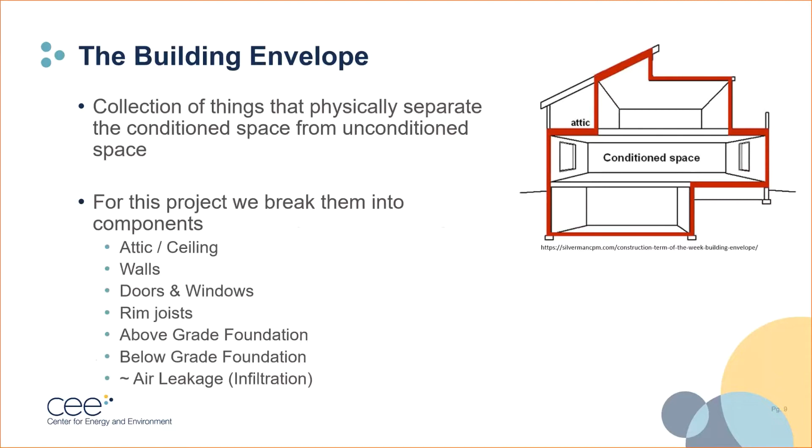And maybe not surprisingly, the building envelope drives space heating load. For those of you who don't know, it gets very cold in Minnesota. Our envelopes shield us from the cold. Their efficiency essentially determines how much energy our heating systems use to keep our buildings and our homes warm, or at the very least not too uncomfortable.

And since it's so cold up here, we do spend the majority of our energy budget heating our homes, sometimes up to 80% for a single family home. And to do that, most of us burn natural gas to meet this load. About 2/3 of single family homes in the state use natural gas to meet the space heating load. Thus, it stands to reason improving envelope efficiency is the largest natural gas savings opportunity in the state.

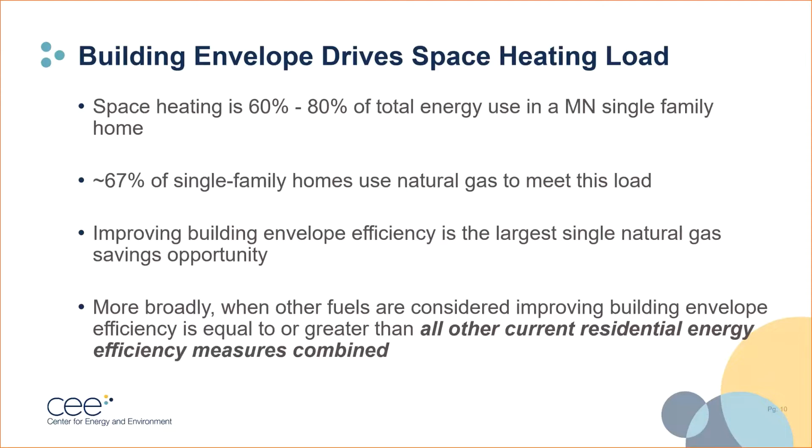More broadly, if we consider the remaining third of our homes that are heated by electricity or propane, and the fact we have to cool our homes, improving building envelope efficiency is overall probably the biggest efficiency potential. In fact, it's probably very likely greater than all other residential efficiency potentials combined. So this is a really big deal. It also turns out to be a very hard and long-standing problem. So how have we gone about treating this problem in the past?

Well, retrofitting building measures is an established process. Conventional measures that do this are often called weatherization. Mainly, we go into houses and seal air leaks. We add insulation to walls and attics. Sometimes we upgrade windows. We often add storm windows to older single pane windows, and we consider window treatments. These things are awesome. And there's been a lot of work done into streamlining these measures and making them cost effective, both in Minnesota as well as nationally.

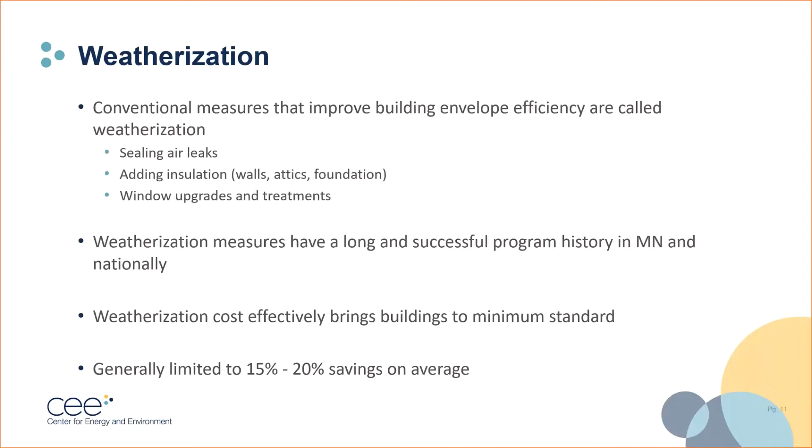However, weatherization is focused on basically bringing the worst buildings up to a minimum standard in a cost-effective manner. That's not really high performance. In fact, while results vary a lot, savings are typically around 15 to 20% for these projects. They're large and good for sure, but they're only a fraction of what's possible in regards to envelope efficiency in a heating-dominated cold climate. So how do we move beyond weatherization? Well, the simple answer is we already know how. We just basically do more of it.

Probably the most long-standing concept beyond weatherization is called the deep energy retrofit. These are sort of whole house projects that seek to overhaul all the systems in a house for very large savings goals on the order of 50% or larger. These projects aren't exclusive to envelope work, but especially in cold climates, the absolute savings of a DER are always anchored by envelope improvements. They bring the most to the table. But in practice, these projects are complex, often invasive and very expensive, and they're usually pursued by extremely motivated building owners who are driven by environmental and comfort-based decision metrics. So what's another perspective on high performance envelope?

Well, this might be somewhat controversial, especially if you're involved in building new high performance homes, but I think current Minnesota new construction code is pretty good for single family homes, of course, relatively speaking. This table shows the difference between existing buildings, so say all those buildings before 1990, and current minimum code, as well as what I hope would be the future code. What I want to highlight here is the difference between the numbers in the first row and the second row. The first row is sort of an average. We just think of it as an efficiency value of the envelope components for the homes built before 1990. The second is current code.

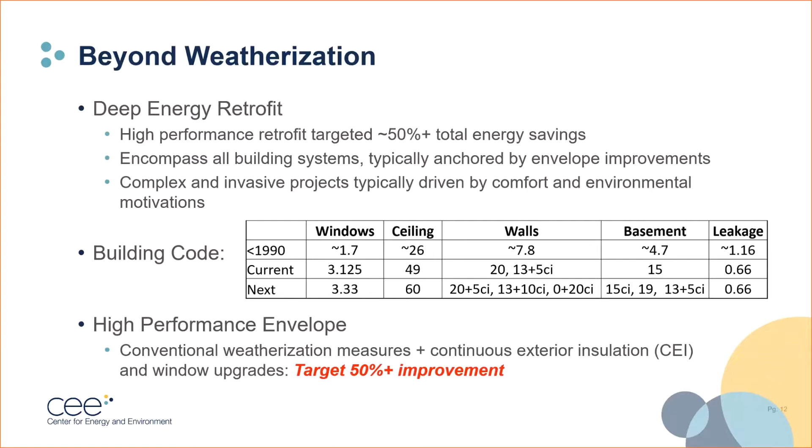In this project, we set a target of 50% to try to match new construction or get reasonably close. We call that a high performance building retrofit. Specifically, we want to see how we can apply weatherization measures, continuous exterior insulation, and window upgrades to achieve that target.

So why, how do we move beyond weatherization? Well, there's lots of reasons for why, in addition to the raw efficiency potential. First of all, we should recognize that we are facing diminishing returns on lots of energy efficiency alternatives. We've already captured a lot of that efficiency.

Maybe this would be required to meet future CIP savings targets. Maybe it'll be required if we're realistic about achieving our climate targets. Energy burdens, infrastructure investments, workforce developments, these are all strong motivators for pursuing this work.

So that aside, what are our objectives? Basically, our objective in this study is to look around and see where we're at today. What are the opportunities and barriers of moving beyond weatherization, according to the stakeholders who are most likely to implement that work? What does it take to make a high performance envelope? What are the natural gas savings, the project costs, and the cost effectiveness? And how do those things vary across our existing building stock?

So next I'm going to hand it over to Lindsay, who's going to describe briefly our outreach methods for this project. Yeah, so one of the initial portions of this project was to interview a variety of stakeholders who would work in this market. So our methodology and goals were comprised of these two aspects. First, we wanted to identify the opportunities and barriers as perceived by the stakeholders. And based on their perspectives, we wanted to try to quantify potential savings, cost, and market opportunities for these projects.

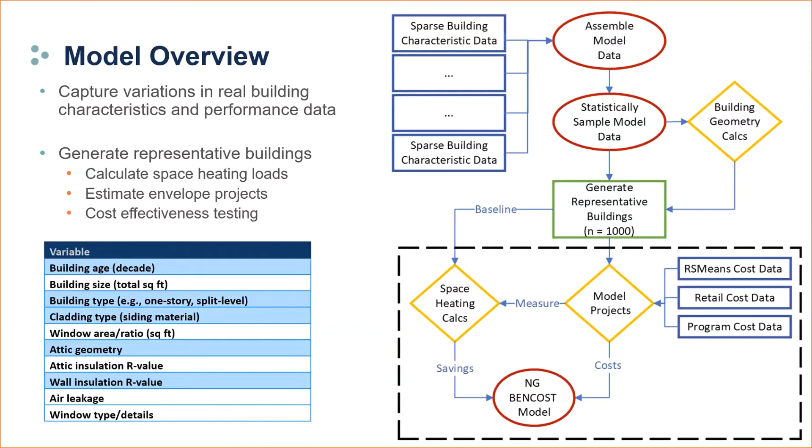And separately, we pulled in cost data from several sources to try to build up envelope projects. Those sources include RSMeans cost data, retail cost data, supplemented by program cost data and bids that we received recently. The idea then is we create these projects, that they create a measure. We can estimate energy savings from those measures. We also have the costs, and we can pipe both those through a cost benefit test. And ideally, this gives us a fairly representative perspective about how savings, costs, and cost effectiveness vary across the building stock. And then, of course, we can vary this for all sorts of envelope projects.

So I'm going to get right into the results here by handing it over to Lindsay. We'll talk about our outreach.

Thanks, Josh. Yeah, so after talking to multiple stakeholders, we came across this first big barrier, which was the lack of awareness that people had for this kind of work. So stakeholders who were interviewed were asked if they were familiar with various types of retrofit. We asked them on a broad scale of retrofit projects like the ones listed here to try to understand what sort of information they were basing their responses on throughout the interview.

We found that many stakeholders were familiar with passive house or being net zero, but not as familiar with high performance envelope retrofits. This was also reiterated through other learning workshops that we attended, but from our findings, we found that 68% of people claimed familiarity with retrofits, while only 52 to 58% could actually define or give examples of a deep energy retrofit specifically.

About 30% of people were just unaware of the work at all. 18% admitted that they didn't know what we were talking about, and 12% just didn't answer the question. So we did give people a definition during the interview, and we kind of discussed and gave context to what we were talking about, and that was our final results for that. So basically, people just didn't know what we were talking about.

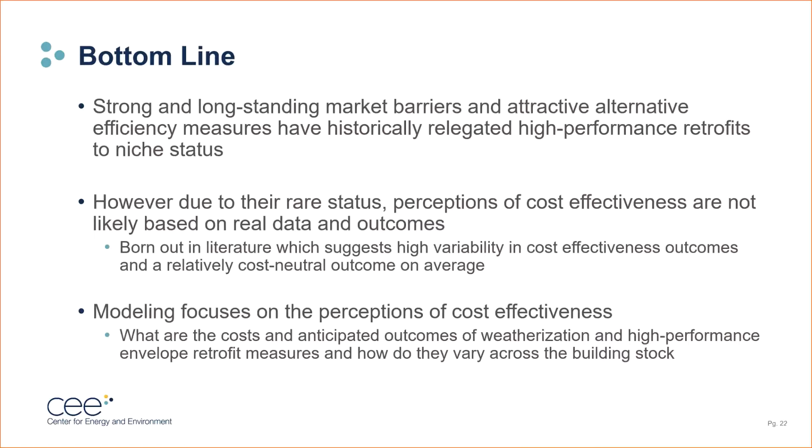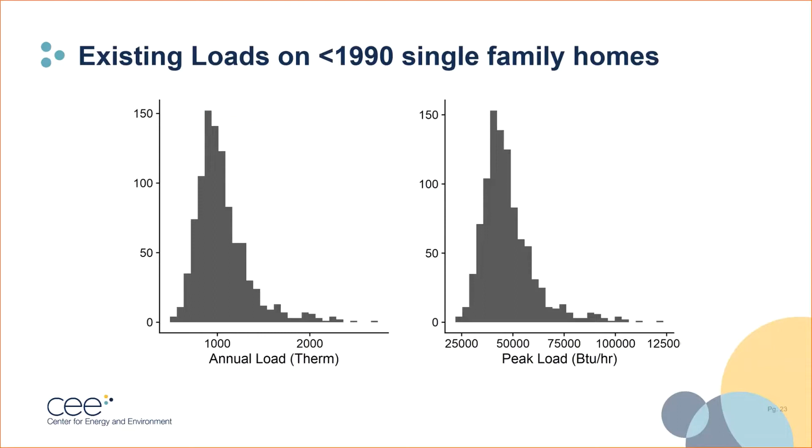Importantly, we've arbitrarily set this benchmark at 1990 for homes that existed before energy code was taken seriously. So for our project, though, we're a little bit more concerned not about the overall loads, but actually what components in the building drive these space heating loads. So the next slide.

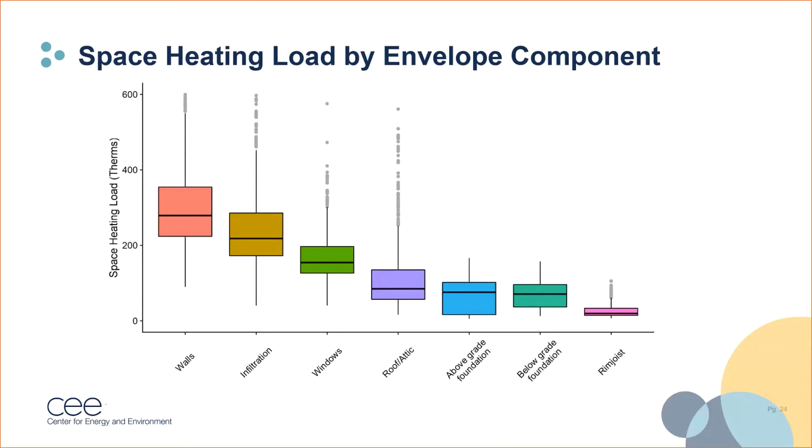So after those major components, we have some of the other things that are not the focus of this project, including the roof and attic in that, as well as the foundation components and the rim joists. So what is our first step? The first step is to use our model to weatherize all these buildings. I want to note that when we say weatherization here, we came up with our own standards, typically lower criteria for engaging weatherization, and then more rigorous standards on what we expect out of weatherization.

We have 5 measures here: air sealing, attic insulation, wall insulation, rim joist insulation, and continuous exhaust ventilation. The last is sort of an artifact of the fact that once you do several of these weatherization steps, the home is often tight enough that it needs some continuous ventilation to enable appropriate indoor air quality. The basic assumption behind this weatherization work here is that we should emphasize weatherization work more than more expensive envelope work. Turns out that this assumption may need revisiting later on, but we'll save that.

So our project costs are based on regression fits to weatherization project data by building size and type. We estimate the costs from that work, and then typical air leakage reductions and the differences in the insulation values of the upgraded assemblies. I want to make note here that we do need weatherization on most existing buildings, even those that are partially weatherized. Basically, we can't get to our target of 40 to 50% space heating load reduction without some kind of base of weatherization to build on. To do so, for example, using continuous exterior insulation requires very thick assemblies and an even larger dependence on windows.

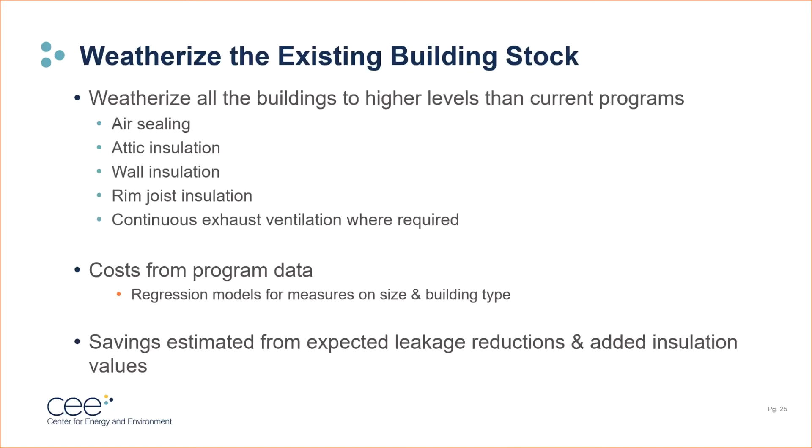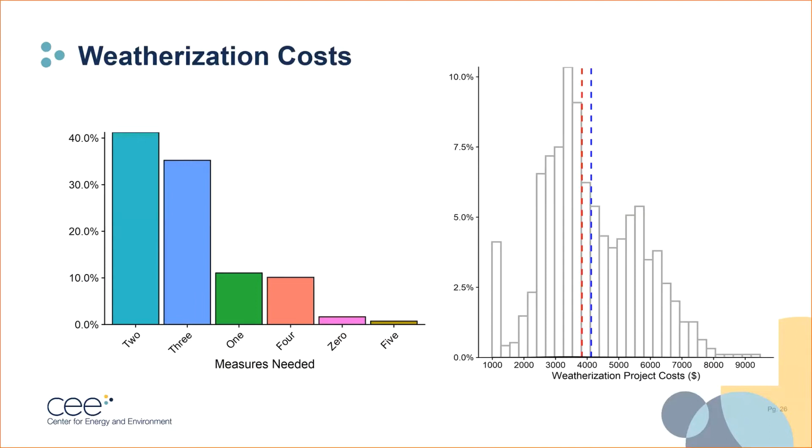On the right side, you can see the cost distribution. We have the average cost in blue and then median cost in red. Again, these both are pretty similar. They come in around $4,000. They're about the cost of doing 2 or 3 weatherization measures. But you can also see on this distribution that it's highly variable, varies between about 1,000. In this case, I think we capped it at 9,500 for this chart.

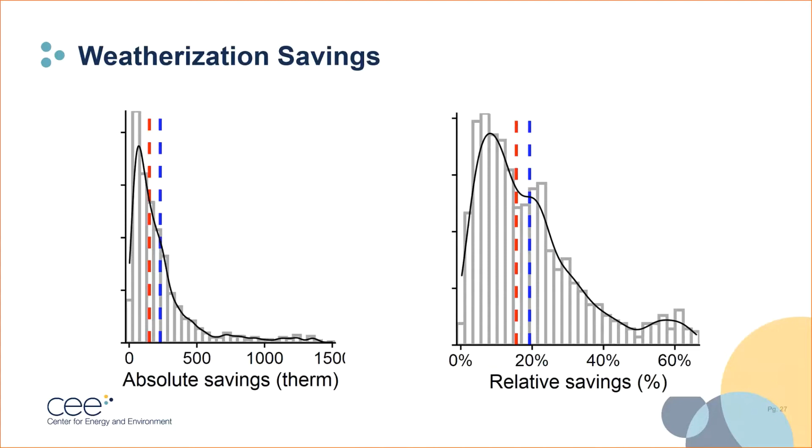So one question we have is, does weatherization actually change our priorities in which building envelope components we should go after compared to the unweatherized building stock? In short, no. Most of the losses are still coming from the walls, infiltration, and the windows in that order. So our next step, as Lindsay discussed earlier, is to try to understand what our opportunities are for taking it up a notch in terms of our envelope efficiency.

In short, we want to add continuous exterior insulation on top of existing recladding projects. There's several reasons for this. First, there's lots of opportunities. We have a lot of buildings that have siding that is beyond end of life. Secondly, many of the costs between a continuous exterior insulation, or CEI for short, and a recladding project are shared. And in fact, this model is pretty conservative. I expect that in practice, there's probably a lot more cost sharing that could be recognized here. And third, exterior renovations have fairly good cost to value ratios. They make dramatic aesthetic improvements to existing buildings.

People like them a lot, and they tend to recoup a fair amount of that in their home equity, which is an opportunity for us to expand energy work if it can be coupled with something that's very flashy, as Lindsay mentioned. It's also an opportunity to couple that with other non-energy benefits, thermal comfort being the main one. And the idea here is coupling these things to make a more attractive package to consumers who may be considering or maybe have been told they need building siding maintenance already. We can upgrade at the time of sale, either pre or post occupancy, or offer a more compelling package compared to other flashy, large dollar energy investments, such as solar photovoltaics or electric vehicles, which frankly are both outperforming envelope retrofits by orders of magnitude, despite probably similar or lesser net benefits.

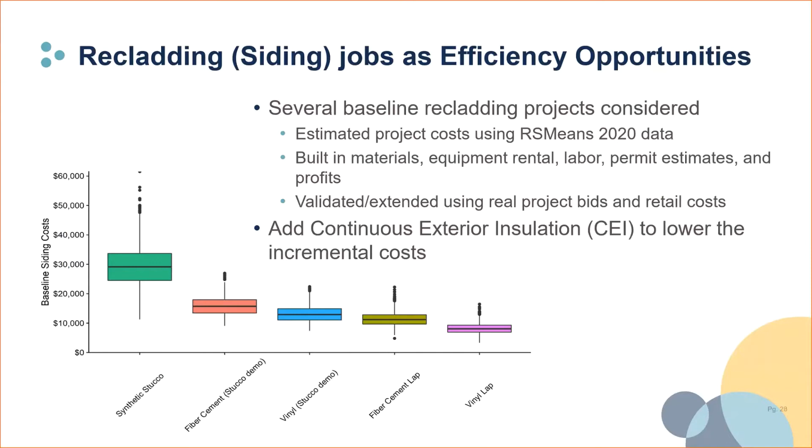So what's next? How do we leverage these projects to improve envelope efficiency? Well, we add continuous exterior insulation. Those siding jobs are our baseline upon which we can bundle CEI and ideally our weatherization and window work. There's a lot of insulation types that people consider for these projects. We've applied many of them here. And again, we try to build up projects around the steps that contractors would have to take to fit these into an existing recladding job.

We have our standard rigid foams, our EPS, our styrofoam, our XPS, extruded polystyrene, our PIR, also known as polyiso. We have our EIFS, which is our synthetic stucco. EIFS is exterior insulation and finish system. I'll note here that this is the only recladding project that actually incorporates some substantial R value in its construction, in this case, 1 inch of EPS. But we could add more insulation to that process too.

SIP is another project that works, structural insulated panel. It's essentially EPS sandwiched by OSB. It has nominally the same insulation value as EPS, but comes in fixed sizes, matching existing dimensional lumber. Then there's our closed cell spray foam, which we kind of apply exterior continuously on the sheathing. Then we have 2 semi-rigid products, mineral wool and something very similar to mineral wool made out of wood fibers.

We look at applying these products and all the construction steps at different thicknesses, which entails doing additional work. Basically adding thickness to the insulation assembly lowers our relative insulation costs, but it adds a lot of ancillary costs. In short, the details can get expensive, and with especially thick envelopes, they can get very expensive.

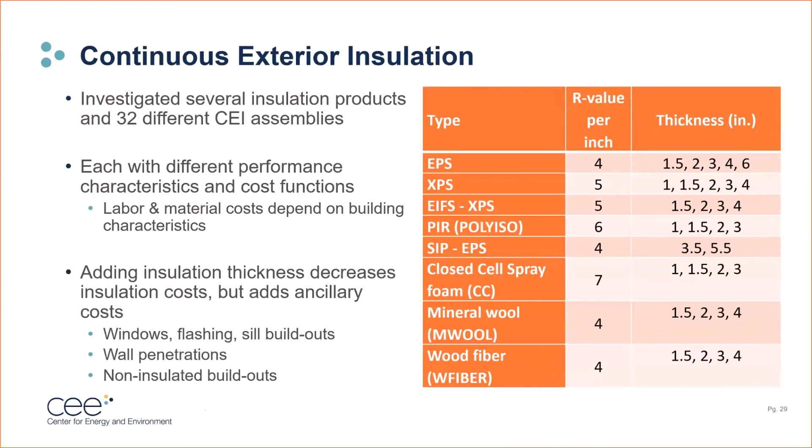So we apply a bunch of continuous exterior insulation, and we make a substantial improvement in the insulation value of the exterior wall assembly. What do our savings look like? Well, we investigated 32 assemblies. The savings are essentially a function of the added R values, and we only have 16 different R values, so that's what we plot here on the curve. Curve shows basically the median savings for a given R value.

That varies across our projects from 18% at adding CEI at R5 up to 32% for adding R24 of EPS. I'd add these are on top of our weatherization savings. And then the individual box plots show for a specific type of CEI measure how much that can vary across our building stock. Again, the variation across the building stock is huge, by a factor of 3, which again is entirely dependent on the characteristics of all the buildings that make up this representative sample.

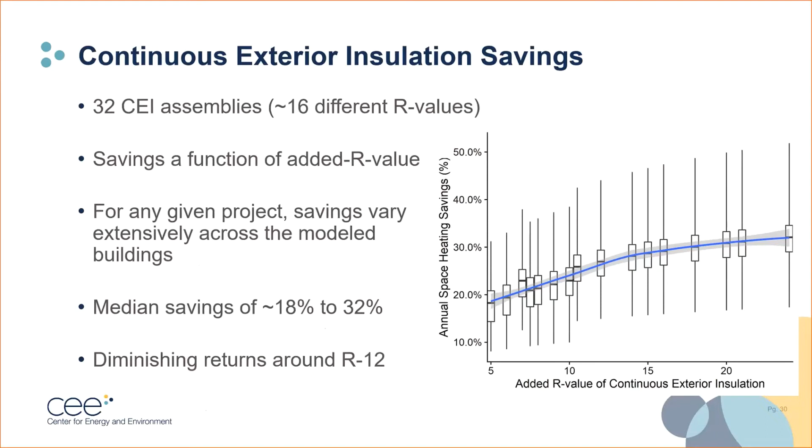The last thing I want to mention here is that if you look at the blue curve, you can see that there's a fairly obvious knee at around R12, beyond which we start to see significantly diminishing returns by adding additional insulation value to our envelopes.

So the costs, the other important piece. There's a lot to unpack here, so bear with me. This chart is structured similarly to the previous one, but there's more information. In this case, I'm plotting the incremental project costs of this energy work as a function of the added R value of continuous exterior insulation. I have several different curves here of different colors to highlight the cost function for each type of CEI over the R values we investigated.

Overall, median incremental costs range from about $4,000 to $17,000. Notably, again, with the individual box and whiskers, we can see the strong variation across the building stock. For each project, costs can vary by a factor of 2 to 4. And we can also see there's maybe some clusters of curves here.

At the high end, we have our relatively expensive CEI projects that use wood fiber, mineral wool, and SIP. You pay the most for CEI assemblies constructed from these materials, basically. In the middle, we have our rigid foams in green. This is our XPS, our EPS, and our polyiso.

And then at the bottom, we found the lowest cost projects in this study are EFIS and continuously applied spray foam. The EFIS makes sense. It's the only one that includes insulation to begin with. Hence, it has the least amount of overhead to simply increase that thickness of insulation.

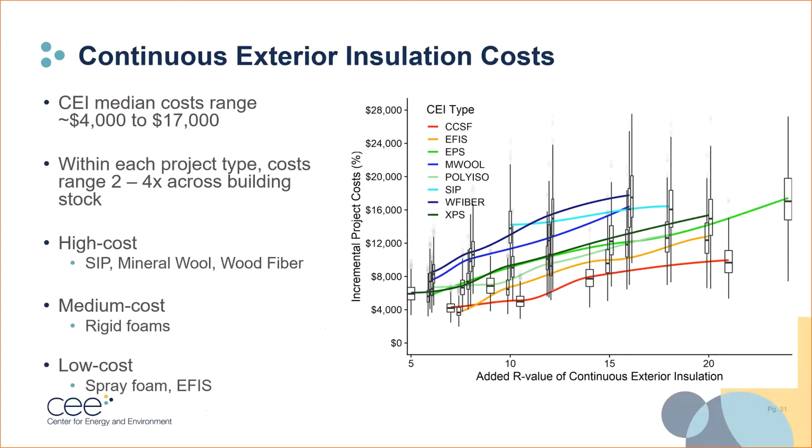So we have costs, we have savings, we can get into cost effectiveness. And I'm showing here one perspective on cost effectiveness for this project, which is looking at the median cost effectiveness results across the building stock for each project type. Turns out we have 465 project types. That's all our combinations of windows, CEI, and weatherization measures. We pipe that through the natural gas cost model for the 21-23 triennium. Specifically, we're going to look at participant cost ratios using only the approved values for that model.

So the first thing I'd like to draw your attention to is this chart on the right. We have our participant cost benefit ratio as a function of incremental project cost. In fact, let's look at the blue dots. We see all the way to the left, we have a dot that sits suspiciously close to 1. Turns out this is our weatherization work. I assure you this was a coincidence that our weatherization work came in at about cost effective, but it does set a benchmark for us. As you can see, as we add to weatherization, all our other projects in the blue dots reduce our cost effectiveness. And that is generally a function of the incremental cost.

However, part of the benefits of this model is we can look inside that building stock and look at those variations. And one thing I'm presenting here is the median cost effectiveness of essentially the 20% best buildings of each project. And if we look at the 20%, this is roughly 100 to 200,000 buildings out of our building stock, things improve remarkably. In fact, most projects with incremental cost less than about $16,000 have median participant cost effectiveness ratios greater than 1.

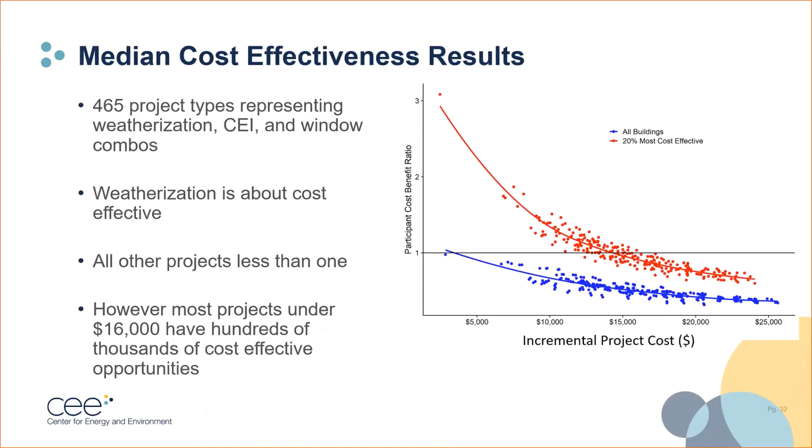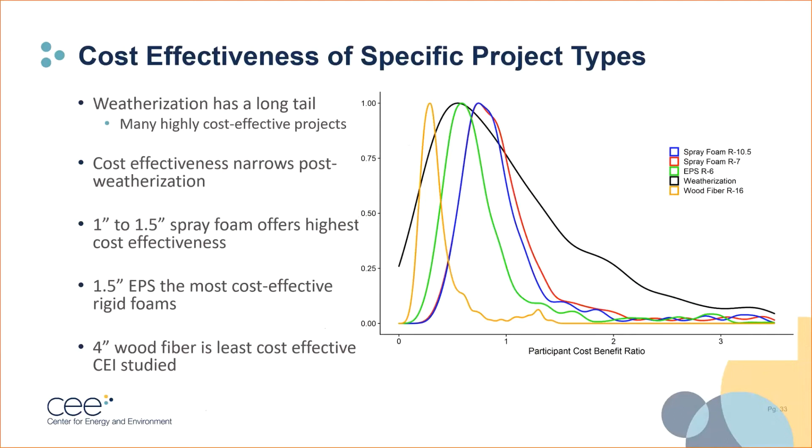So another thing we can do with our model is figure out what leads to cost effectiveness. First, we acknowledge it varies a lot, and a lot of existing approaches miss these variations by looking at averages or perhaps only considering archetypes. But the statistical approach lets us see inside the building stock, makes it easy to identify opportunities on the saving side as well as the cost side.

So the next question is, what do these buildings have in common? We'll save a lot of the details for another day, but some general findings are they're geometrically simple buildings. 1880s Victorians may be architecturally wonderful, but they're expensive to retrofit. Meanwhile, mid-century rectangular ramblers have easy exteriors to work on.

The buildings tend to be a little bit smaller on average than the existing building stock, and they have slightly higher window area. In terms of performance, they typically have little to no wall insulation, as well as infiltration rates higher than the overall building stock. And from this, they have disproportionately high heating loads. So in summary, that's a lot of words to say they have lower retrofit costs and higher retrofit savings.

I want to give a quick note about windows here. We did look at windows in this project. I don't have time to get into that here. Bottom line, windows rarely, if ever, improve cost effectiveness, but sometimes they don't hurt too much. They help with some of the more expensive envelope assemblies. There's probably more cost synergy between window replacements and what we've recognized in this study. So maybe there's room to improve.

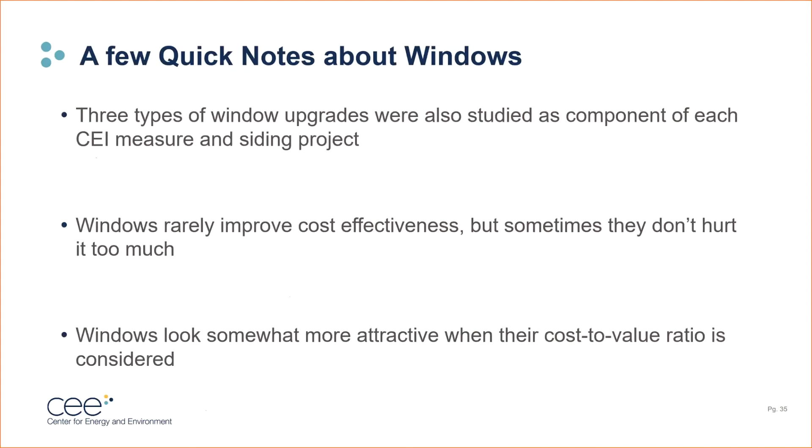So, talked a lot. I'm going to run through these conclusions really quick so we have some time for questions. But in the end, we've done weatherization in a relatively brute force, rigorous way. But it's shown that weatherization should be expanded. We have pretty good cost effectiveness from blindly doing this to our entire building stock. We should set higher standards and increase implementation.

Again, cost effectiveness is complicated. It varies across the building stock. It has just as much to do with the building characteristics as it does with the efficiency levels of the measures. That said, while median cost effectiveness is less than 1, we have lots of cost-effective opportunities. At least 100,000 natural gas heated homes in Minnesota have a path to deep savings. I'd also like to reiterate that even at these diminished levels, these cost-effective opportunities likely are the largest opportunities statewide.

And then lastly, these results are challenging. They've been difficult to interpret and present. And this definitely is not the final word, but I think there's a lot of uncertainty here. I think what we've shown by blowing up this process in a statistical way is there's a lot of opportunity here for further research and implementation.